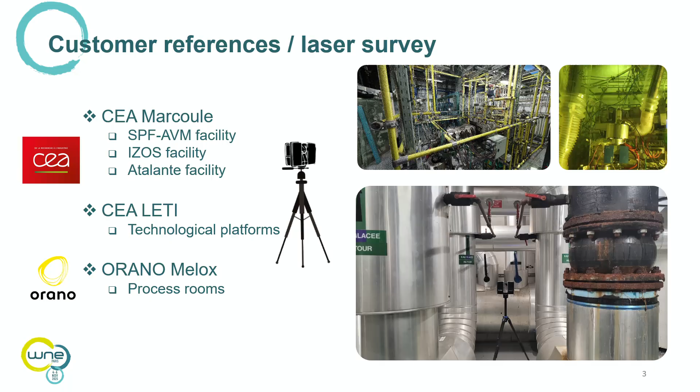So let us now discuss our traditional activities through these few slides. Firstly, laser scanning for various nuclear facilities, sometimes in contaminated hot cells, where a scanner without a battery or Wi-Fi must be brought in.

We then use these models to create 3D operating procedures which are used for maintenance and operator training.

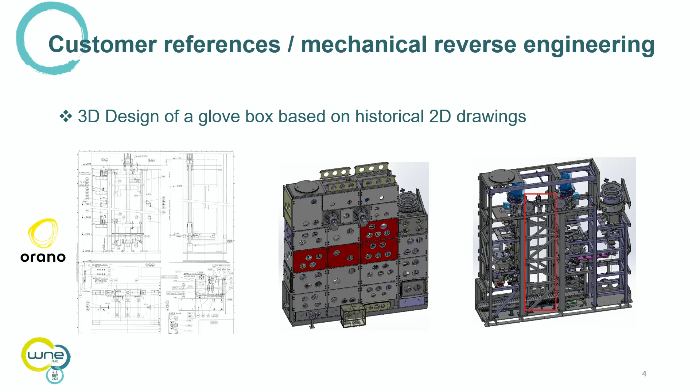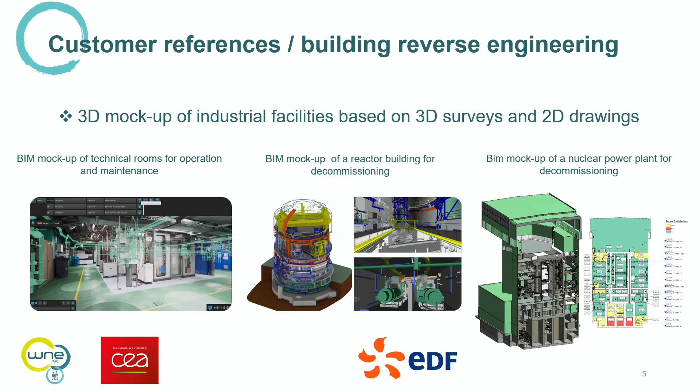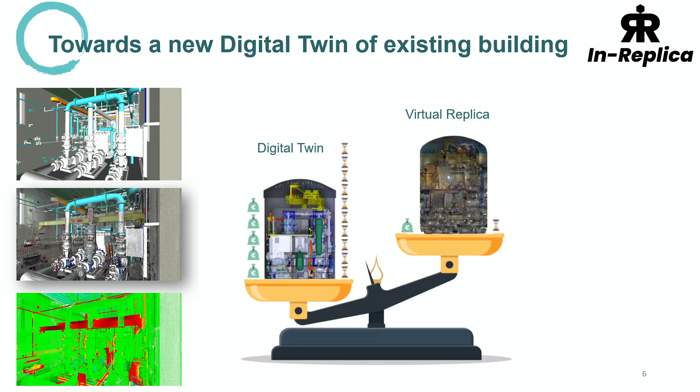Our In-Replica solution is the result of an observation. Creating a digital model of an existing building takes a lot of time, months for several BIM designers, and is therefore expensive. It can sometimes take a year to obtain the BIM model of a nuclear building.

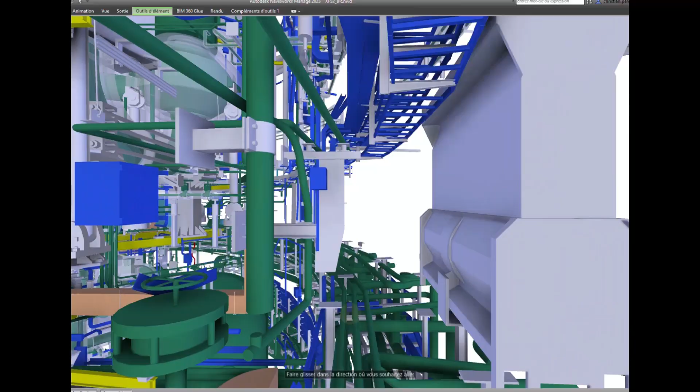Here is an example of a reactor building that we created from billions of points and extensive documentation. Each network and each piece of equipment is referenced and enriched with attributes, forming a comprehensive database of the facility. Everything is checked with centimeter accuracy using what we call deviation maps. This model is often reserved for and confined to the design office, and it's of little use to other departments.

So I'm going to give the floor to Morgan.

We have therefore laid the foundation for what we call a virtual replica, using the wealth of data provided by laser scanning to create a faithful and realistic copy of the environment.

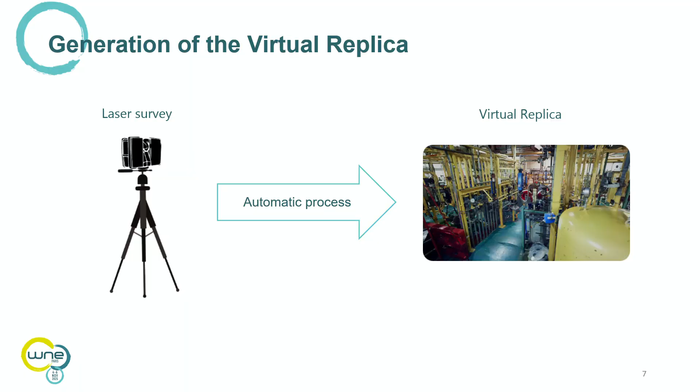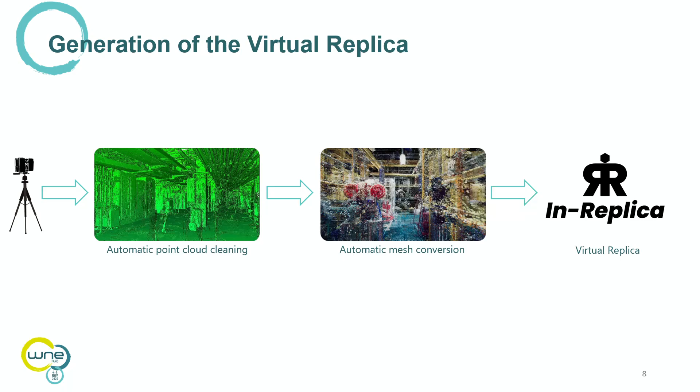Our creation process is fully automated, whether from cleaning up stray points or converting to textured meshes. This drastically reduces the size of the data. And we also have innovative solutions to improve the quality of laser scans in environments with transparent or reflective surfaces.

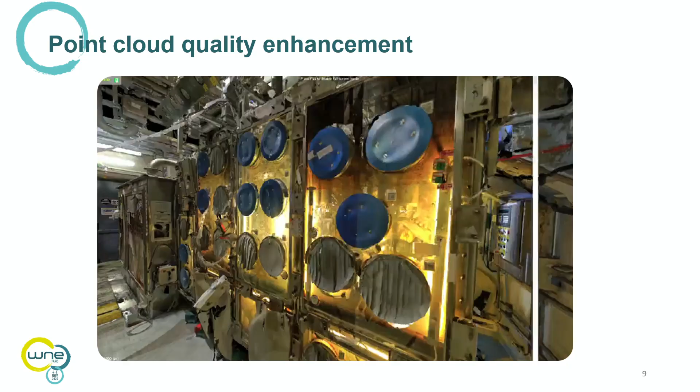The first step in our process is to create a virtual working environment. This involves producing a photorealistic virtual replica quickly and easily at an affordable price by making it accessible to everyone on standard office computers.

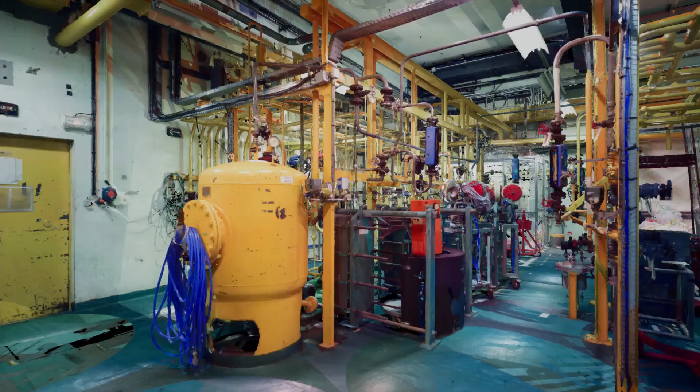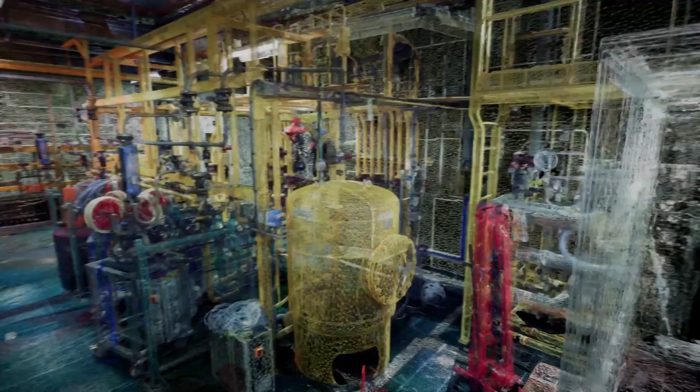You work in the nuclear industry and you are probably all faced with the same problem. Your facilities are highly restricted and difficult to access. Just to enter them, you need to wear special clothing, have authorizations, safety equipment, etc. But carrying out work is even more complicated. You need authorizations from the facility manager. Equipment must be available. Safety analysis must be carried out. Operating procedures must be followed, etc. In other words, there are many barriers and constraints to our interventions.

It is this observation, that of a constrained facility, that led us to propose the virtual factory as an alternative to the real factory.

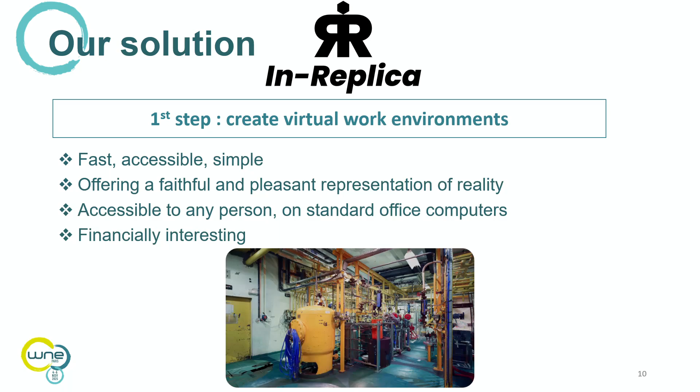The second step is to enrich these working environments with professional knowledge. We will show you that what we believe could be a virtual factory with one primary objective: to remove the main barrier within these facilities, the access.

Access is fundamental because before working in a nuclear environment, you first need to know it, and to do that, you need to be able to enter it. Knowing and perfectly mastering our actions, as well as the equipment we work on, is essential. The safety of the facilities depends on it.

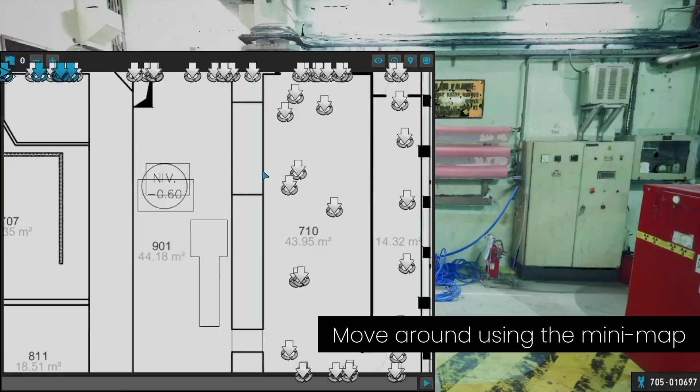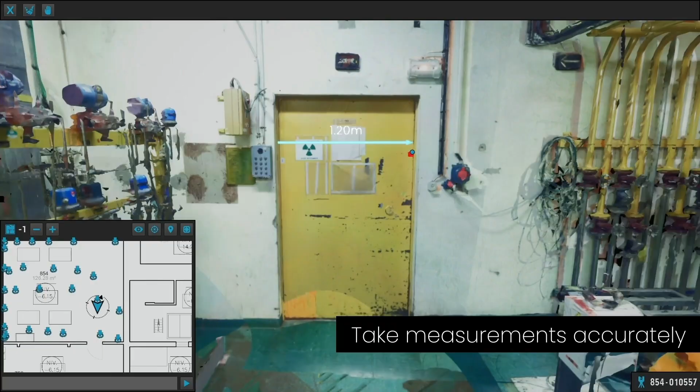We have therefore created Visit, the virtual tour application for navigating in-replica environments. With Visit, you can explore the installation and move around freely in any room using a map. You can perform basic actions such as taking measurements with centimeter precision. Several modes are available in addition to the free and photorealistic mode. With high-definition panoramic photos integrated, you can zoom in on details such as reading labels, as you can see here.

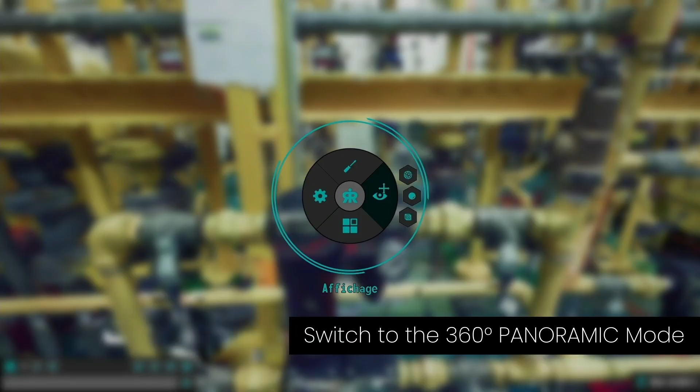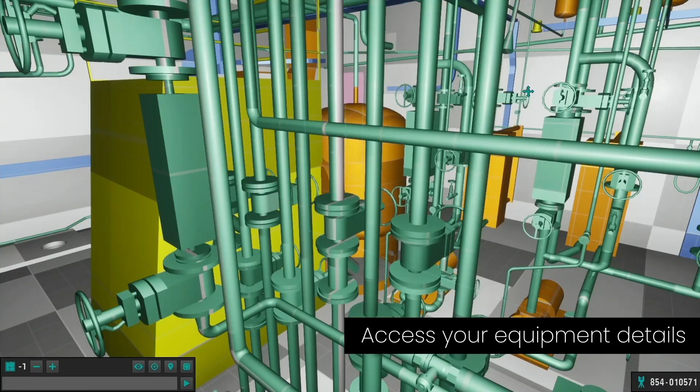And since BIM models will always be essential when it comes to manufacturing, building or modifying, Visit allows you to integrate your models and superimpose them on photorealistic environments. This allows you to query your model data, filter, and access specific equipment, such as a valve, using its functional marker.

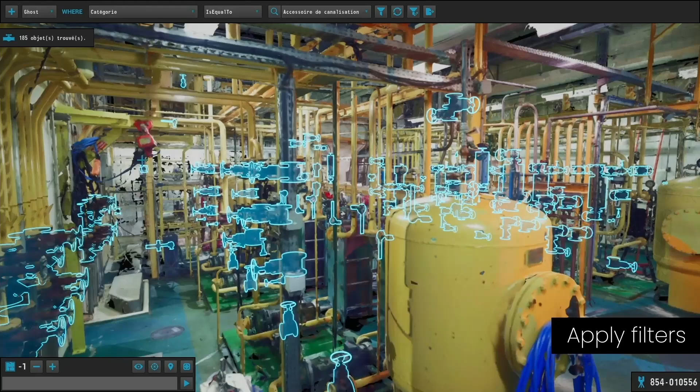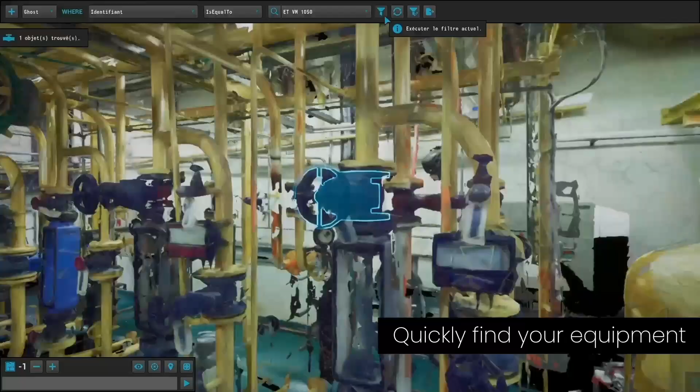In-Replica is much more than a virtual tour solution. Above all, it is a genuine work environment which we have divided into 4 major areas within the facilities: operation, safety, maintenance, and engineering. With these 4 areas, we aim to provide an in-replica solution for each of the professions that coexist within a nuclear facility and need to work together in a collaborative manner.

To work well together, it is above all important to know the facilities in order to master interventions. It is also important to capitalize on the information collected by each party through their studies or interventions, to characterize this information and associate keywords with it, and then to organize it so that it can be easily and reliably retrieved and shared. In-Replica was designed for this purpose: the collection and recording of information in a collaborative mode.

We have therefore combined the virtual tour in In-Replica environments, which you saw with our Visit application, with other business applications, a section of which you can see there. These security applications will enable you to inform your digital environment.

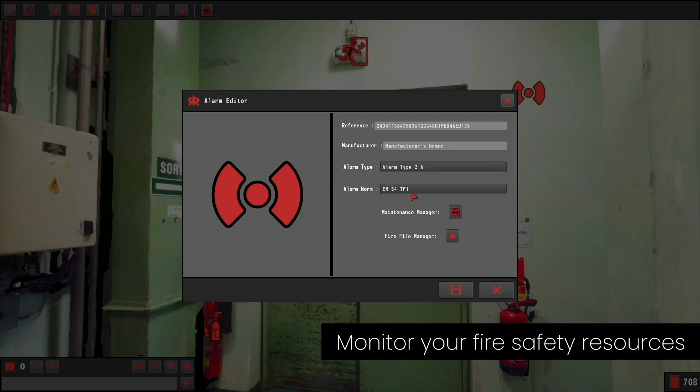No Fire, Prevent, G-Ray. The No Fire fire safety management application, where you can identify and locate your fire prevention equipment, where you can characterize them with their names, brand, or periodic inspection dates, to which you can associate documents such as user manuals or maintenance procedures.

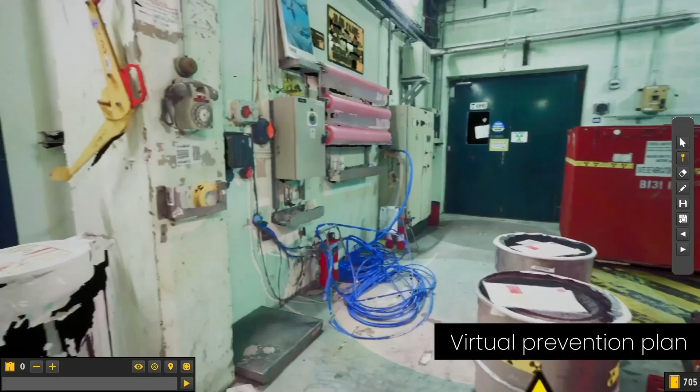Prevent, another safety-related application where you can identify and locate your risks for prevention plans, where you can represent risk-generating facilities and equipment such as scaffolding, hotspots, live electrical equipment, and where you can describe this risk in virtual prevention plans, which are much more explicit than a real prevention plan, since you are immersed in the scene, representing the intervention and can explicitly visualize the risks.

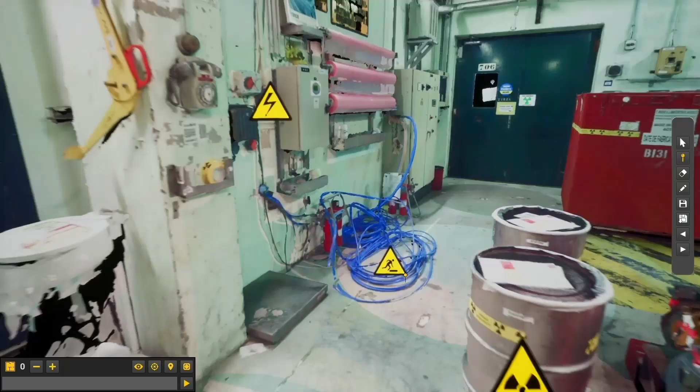Each of these applications automatically provides a summary document that can be easily printed and distributed.

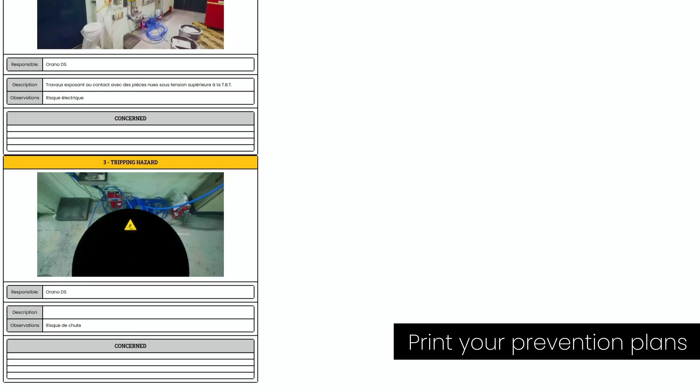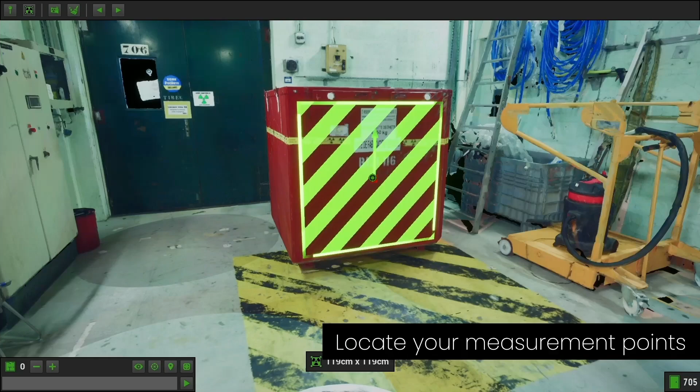The G-Ray application enables the creation of 3D radiological maps, which are much more informative and explicit, thereby reducing the doses absorbed by the emergency personnel. With G-Ray, response teams, particularly decontamination teams, can truly visualize hotspots and contaminated areas. This allows them to target their intervention, optimize them, avoid significant time loss, and truly reduces the dose absorbed.

In the video playing behind me, you can see excerpts from each of these applications. They are distinguished by their color code and abbreviations, but they all have the same environments and the same operating interface to make them easy to use.

They are accessible in collaborative mode for all stakeholders in your area of activity, and they can be used in parallel. But they are also associative because you can switch from one to another within the same scene. This means you can locate your fire protection measures in No Fire and display them as a means of prevention in Prevent for a prevention plan.

These applications are generic examples that we have devised to provide a standard solution to business needs. However, they can be adapted to each customer, who can transpose their own business activities to them through specific applications relating to radiation protection, security management, scenario simulation, or even in-situ design.

For maintenance, for example, we have Identity, which will enable you to identify and characterize the equipment you wish to work on and thus secure your operating procedures. This application will be extremely useful and will truly simplify the description part of your safety analysis, which is often a source of misunderstanding, rework, additions, and therefore delays.

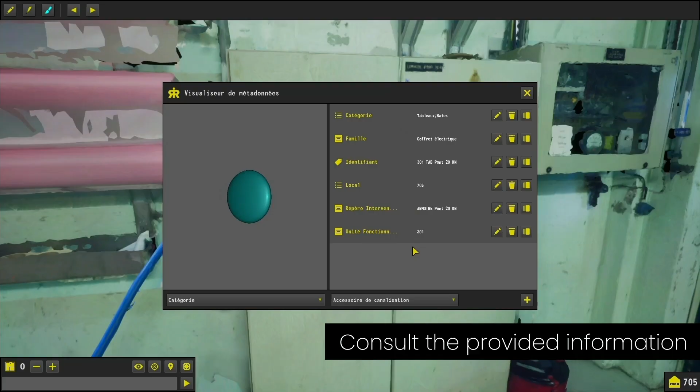These applications enable you to inform and enrich your environment, optimize your processes by visualizing them, and allow you to share information across all your business lines.

Our applications meet one of the major fundamentals of safety principle: know and describe your facilities. By storing information securely and making it accessible in a simple, quick, and explicit manner, our applications enable safety and maintenance teams to better control their analysis, better describe their instructions, and better communicate them to the operational team responsible for applying them.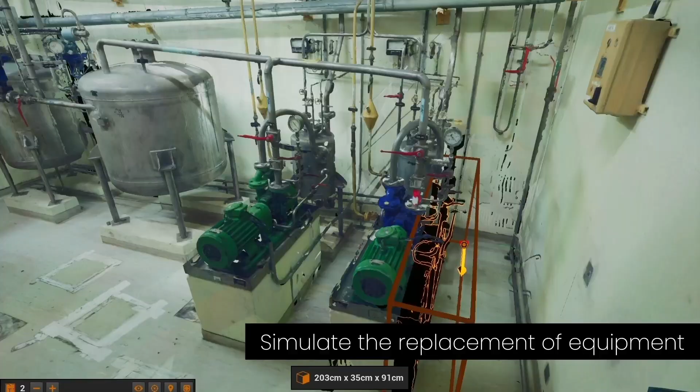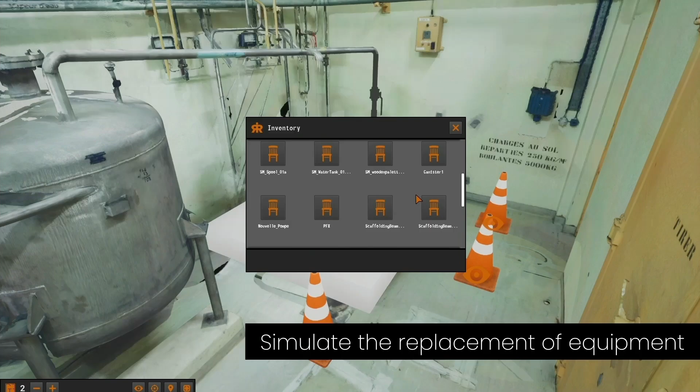Another set of our applications concerns design and simulation, with examples such as Redesign and D-ELEC. With Redesign, you can simulate a scene, simulate the replacement of piping, equipment, or any other object. You can integrate your new machines into these environments and visualize their footprints and their connection to utilities. You can also visualize your process as well as your operator's workstation.

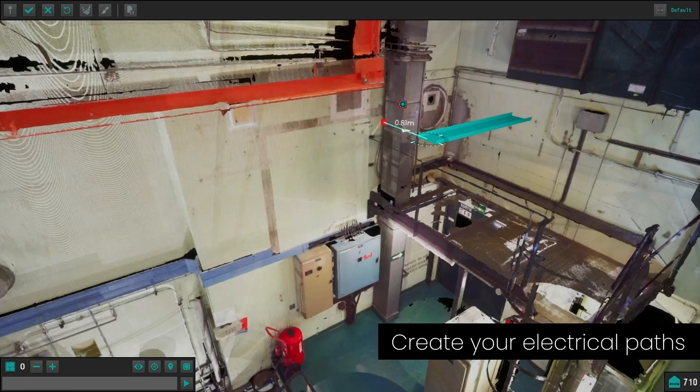We also offer even more advanced applications for truly immersive design. The video shows you our in-situ D-ELEC design application. It allows your engineers to design directly in the real environment, in known and controlled environments, and to extract your design directly into Revit or SolidWorks.

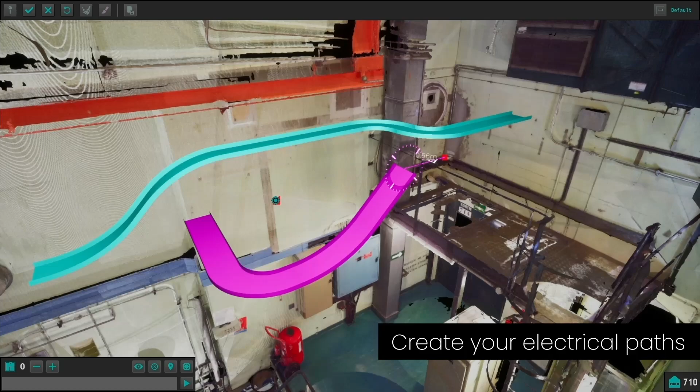In-Replica means less on-site surveying, less dosing, less errors, less rework, and less time spent. But it also means more collaboration, more interaction, more exchanges between trades, and more control over our scenarios. Less sequential and more parallel.

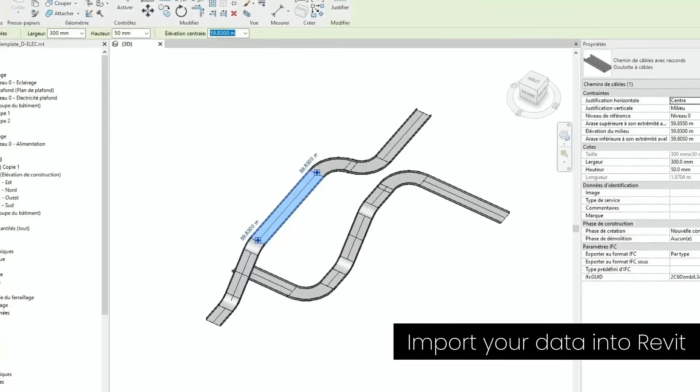And there are even more applications, all designed to improve your processes for inspection and maintenance. Our solution, In-Replica, will provide permanent access to your facilities for all your employees, so that they can work there in order to plan, design, organize, and manage.

A quick note on the IT architecture. In-Replica only operates on your internal servers to keep your data confidential. We do not store anything in the cloud in order to preserve the sovereignty of your facilities. Access to the various premises of your facilities is granted by your administrator. There is complete collaboration between the various users connected to your intranet.

And to quickly demonstrate our fast action time, we arrived here 2 days ago with a scanner, and we've scanned parts of the World Nuclear Exhibition. So here's the application we made.

You can see the different points of view of the laser scan, and then you can see how quickly we can act and redesign the whole place.

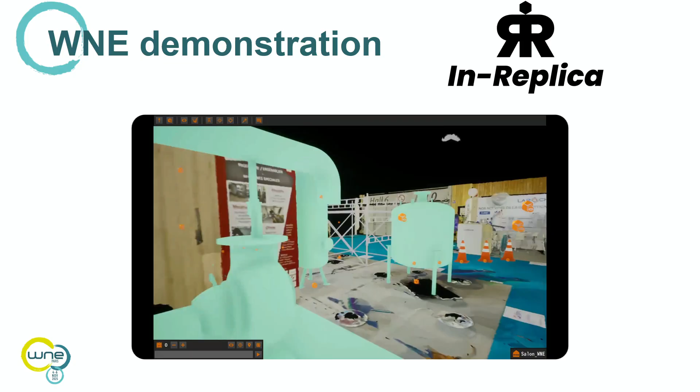And so we kindly asked our neighbors if we could have some space. And so we installed our pipelines and started processing some things. Eventually, we were not satisfied with the installation, so we went with something a bit more cozy.

Isn't it wonderful? And if you care to have a drink, we have a vending machine there.

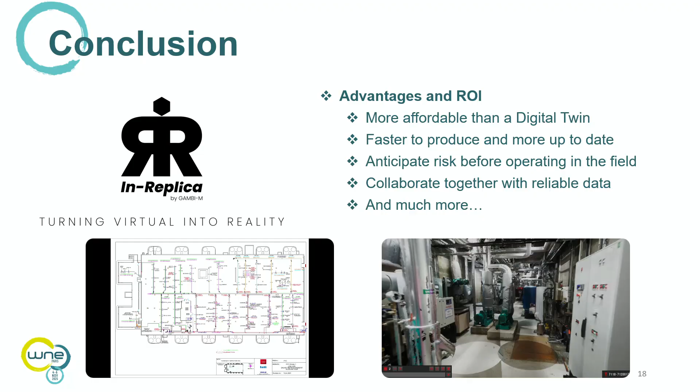Thank you, Morgan, for this quick demonstration of our solution.

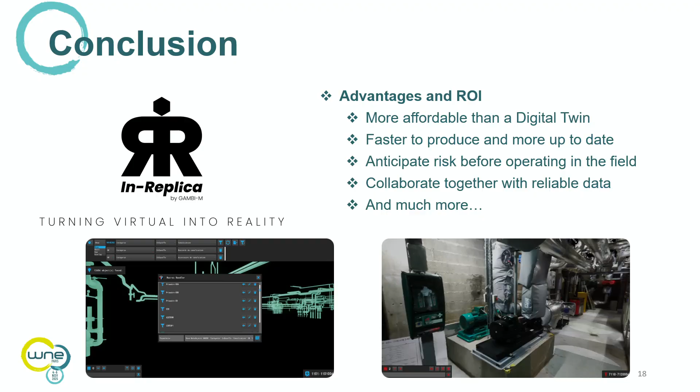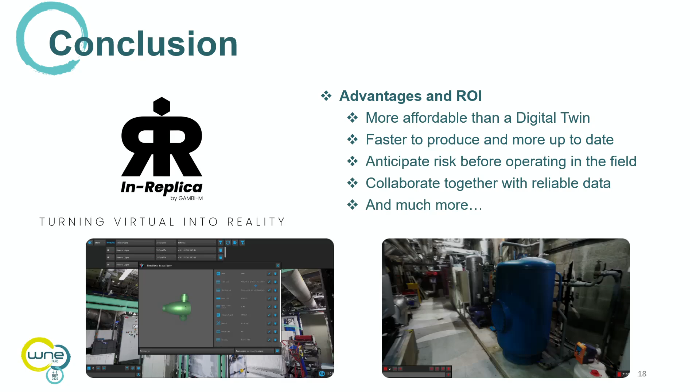So in conclusion, we believe that In-Replica offers several advantages and a good return on investment. It is much more affordable than a BIM digital model, which is at the heart of the digital twin. The virtual replica is quick to produce and easier to update. In-Replica saves time and allows you to anticipate risks before going into the field. The collaborative mode provides a more secure data repository, and much more.

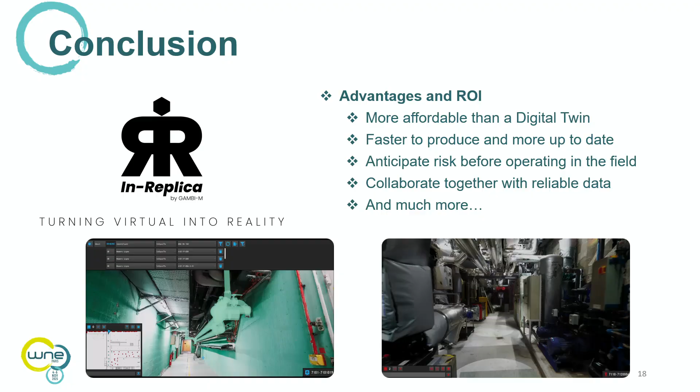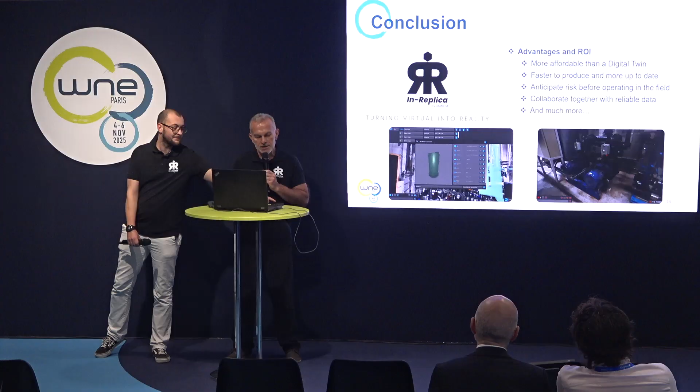So we have now concluded our presentation and hope that we have opened your eyes to a new way of approaching the digital transition of your factories. You will find our contact details and links to our media below.